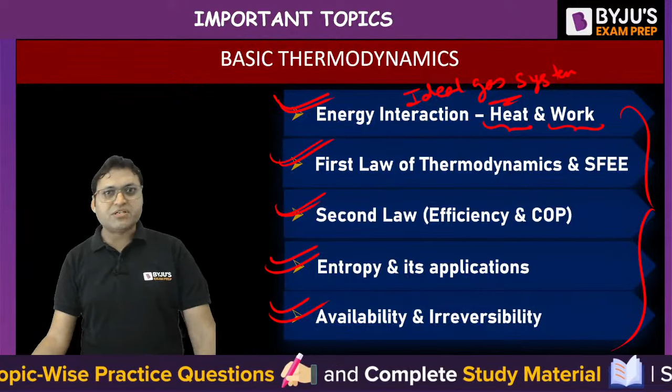And the next important topic is availability and irreversibility. So 90% of the chances are there the question will be framed from any of these topics in your GATE 2024 examination. Still, there are some topics which are again important, like energy interaction along with the ideal gas system, the various processes, how to draw on PV diagram, TS diagram, etc. The basic. And other than that, gas mixture is important. Sometimes thermodynamic relations are also asked, the direct memory based questions. What is the correct expression for any thermodynamic relation, etc. And sometimes the question is asked from the Joule-Thomson coefficient as well. So there are other topics, but these are the most important topics in your basic thermodynamics.

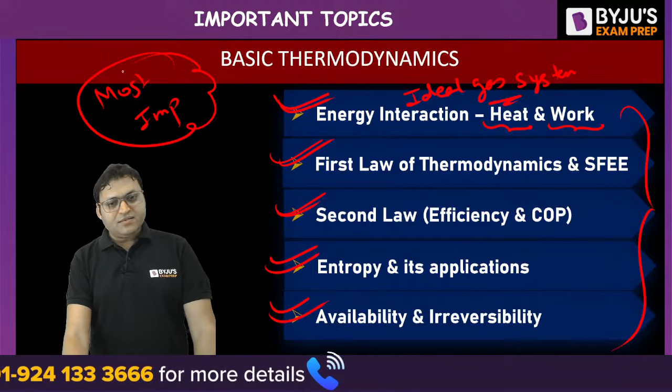Then the application of thermodynamics, the first application is refrigeration and air conditioning. In GATE examination, very few questions or very few topics are asked from your refrigeration and air conditioning. It is not very important. So the topics which are important, you can refer if you have any doubt in any of the topics in R&AC, then these are the standard books. You can refer any of them to get clarity about your doubts: C.P. Arora and R.K. Rajput.

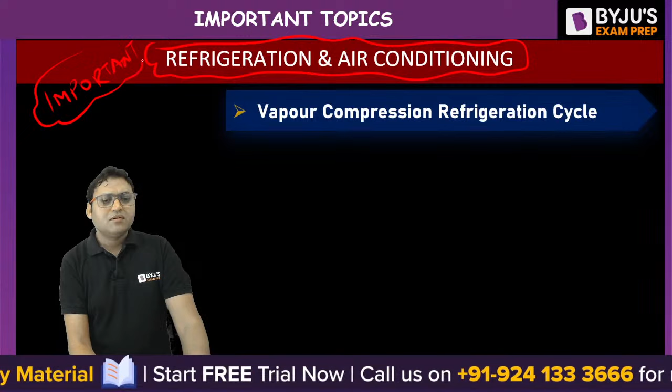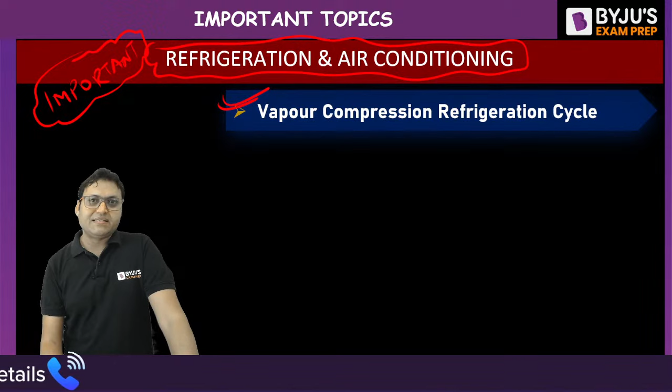The important topics, here I am mentioning the topics which are important, not most important, because very rare chances are there that the questions are framed from refrigeration and air conditioning. If it is going to be framed from vapor compression refrigeration cycle, the question will be of 2 marks. It cannot be less than 2 marks. VC cycle. It can be vapor absorption cycle. These cycles are important.

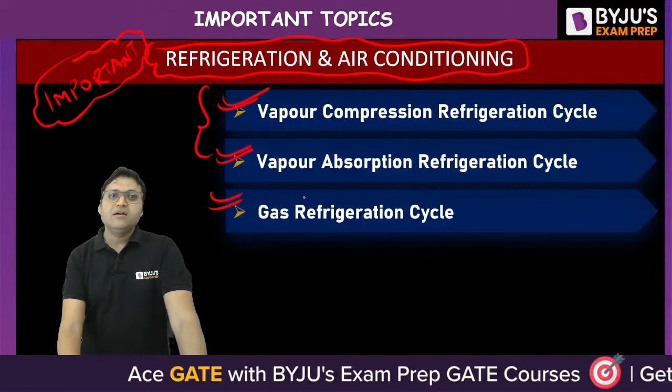VC cycle and VA cycle. Then gas refrigeration cycle, Bell-Coleman cycle or reverse Brayton cycle, and COP of a gas refrigeration cycle.

Then isentropic efficiency of a compressor and isentropic efficiency of turbine is also an important concept we should understand, because if the processes are isentropic, we develop the standard formula. But if the processes are not isentropic, if the compressor or turbine is not having an isentropic process, then we use the concept of isentropic efficiency.

Then the psychrometric in air conditioning - these are the topics. In refrigeration and in air conditioning, psychrometric terms, various psychrometric terms, and how to draw the psychrometric chart. That is the only important topic in your air conditioning.

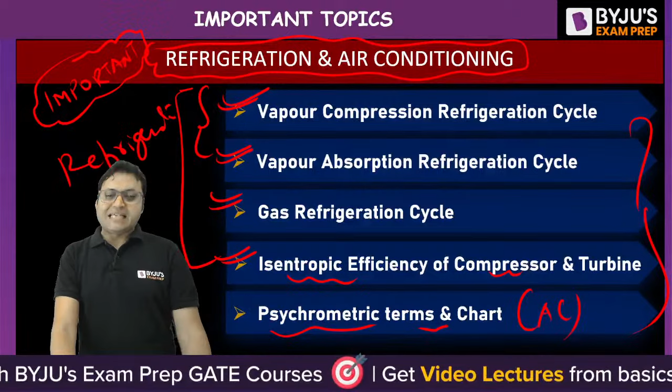So if you are able to understand these topics, it means your refrigeration and air conditioning topic is almost covered. 90% of your syllabus, or 90% of the questions, will be appearing from these topics only. Let us move to the next topic, that is power plant engineering and IC engine.

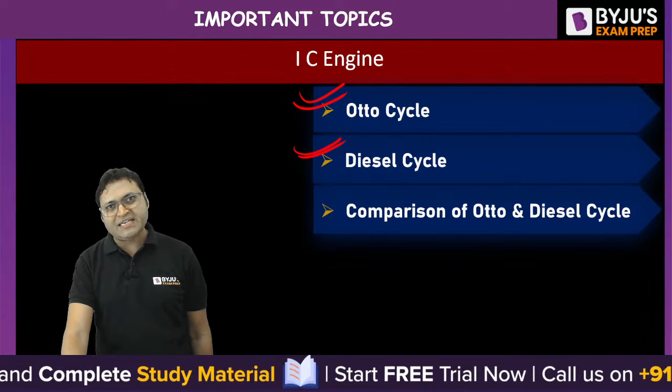Otto cycle is the most important - this is the decreasing order of their importance. Otto cycle is the most important, used in SI engine. Then the diesel cycle is also important; questions come from the diesel cycle as well - direct formula based questions, and theoretical questions can be framed from the comparison of Otto and diesel cycle on various parameters like same compression ratio, same maximum temperature, same heat addition, same heat rejection, etc.

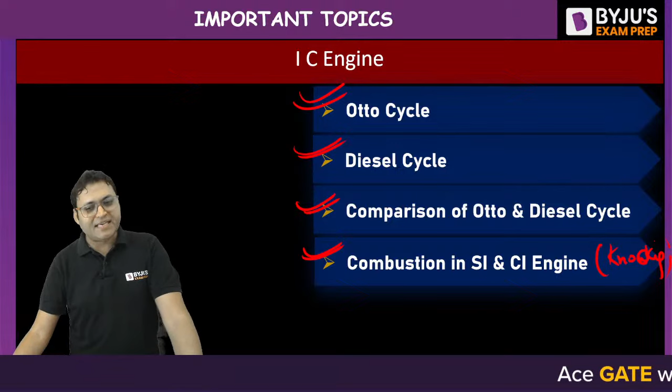Then combustion in SI engine and CI engine, the theoretical concept of knocking - knocking in SI engine, knocking in CI engine, how knocking happens, what are the factors to avoid knocking or detonation in these engines. So combustion in SI and CI engine. Next is stoichiometric air fuel ratio - lean mixture, rich mixture, what is the meaning of stoichiometric air fuel ratio, etc. Basic understanding of air fuel ratio in case of IC engine.

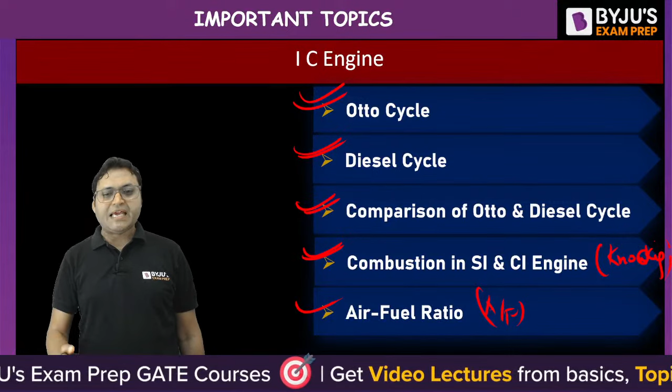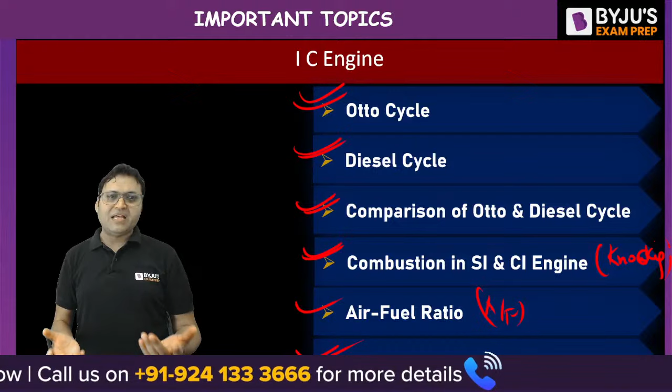And one more important topic is engine performance parameters like indicated power, brake power, frictional power, mechanical efficiency, brake thermal efficiency, indicated thermal efficiency, indicated specific fuel consumption, etc. There are so many terms for which we have formulas. If you know those formulas, you will be able to get the correct answer to questions related to engine performance parameters. So these are the most important topics of internal combustion engine, right?

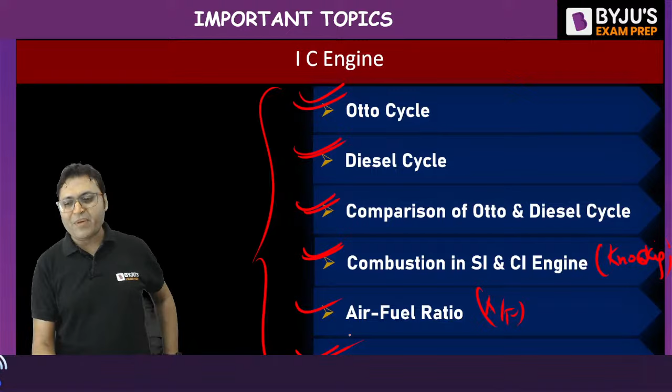And the last application of thermodynamics is power plant engineering. Again, you can refer PK Nag for your doubts in any topic, or you can go for Khajuria and Dubey.

These are the authors of these books, Power Plant Engineering. So not only for written examination, thermal engineering is important, but also if you want to have your MTech in thermal engineering, this knowledge will help you a lot in excelling in your MTech as well. Moreover, because the subject has widespread practical applications, that is the reason it is important for your interview also. So you cannot skip this thermal engineering part. If you are a mechanical engineer, you should be very comfortable, very confident in thermal engineering. You do not have a choice, right?

Let us move to the most important topics in power plant engineering, the Brayton cycle. The efficiency of the Brayton cycle and how to draw it. If one parameter is increased, what happens to the other parameters. Theoretical, conceptual as well as numerical questions are framed from the Brayton cycle, along with intercooling, reheating in the Brayton cycle, how to draw reheating, and how to analyze the Brayton cycle along with reheating, intercooling and regeneration.

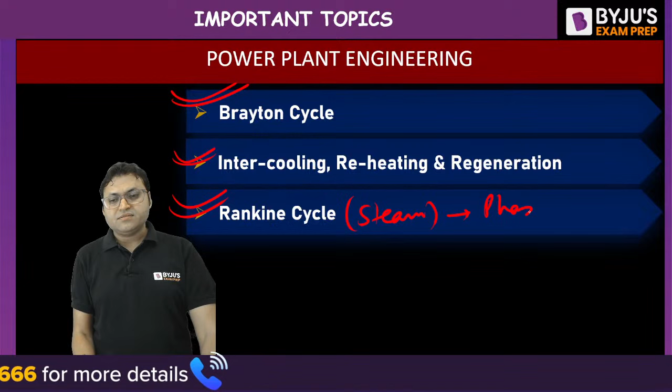Then Rankine cycle, which uses steam undergoing a phase change. Brayton cycle uses air, or a gas.

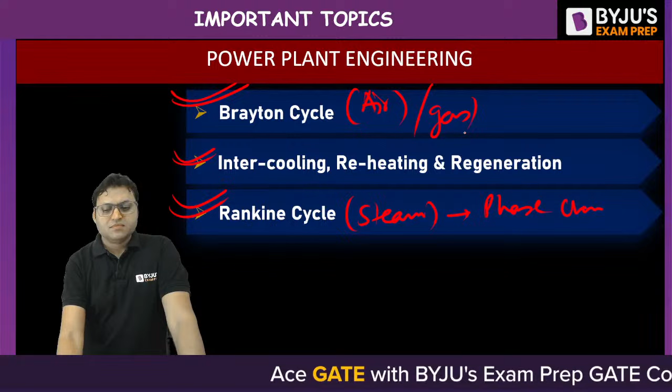Next is the compressor. The velocity triangle, less important though, but centrifugal compressor, reciprocating compressor, axial compressor. The basic formula related to the centrifugal compressor, how to increase the efficiency, what should be the condition for maximum work output, etc. And then in turbine, in steam turbine, impulse and reaction turbines, some basic formulas regarding those.

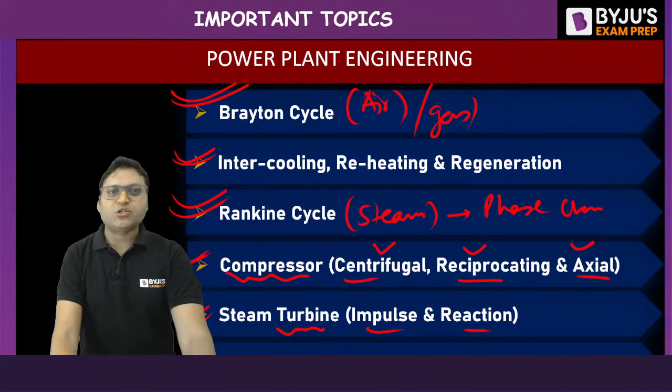Power plant equipments, and then compressible flow is also a part of your power plant engineering. That is also important. These are the important topics which you should revise thoroughly if you want to develop the confidence to get 100% marks in your thermal engineering.

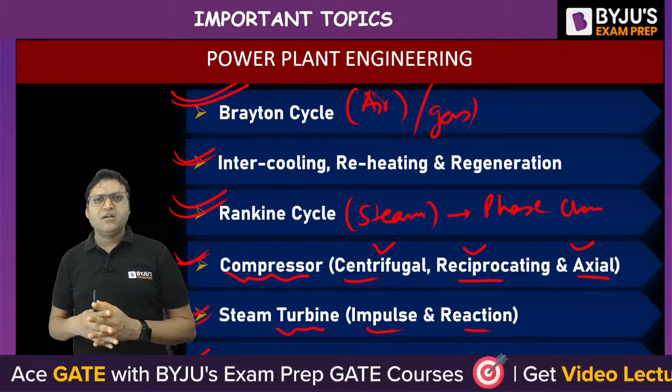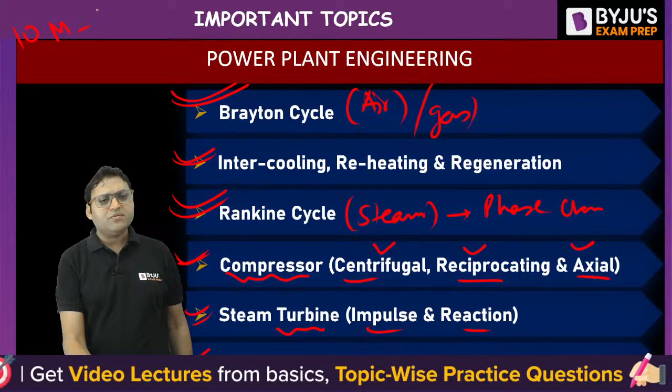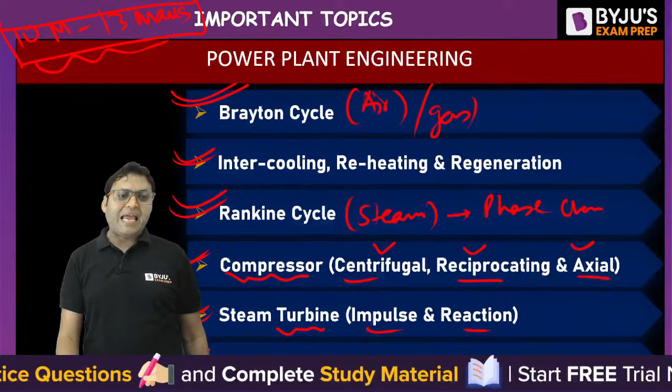In technical subjects, the highest weightage carrying subject is production engineering. It carries around 15 marks, 14, 15, 16 sometimes as well. And the next highest weightage carrying subject is thermal engineering, which carries around 10 to 13 marks. You may find questions lying between 10 marks to 13 marks in your GATE examination from this subject.

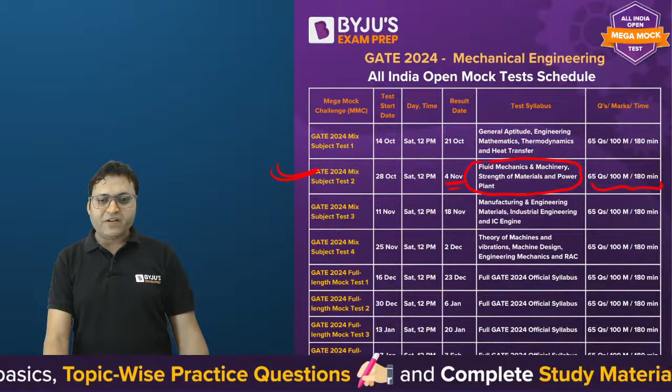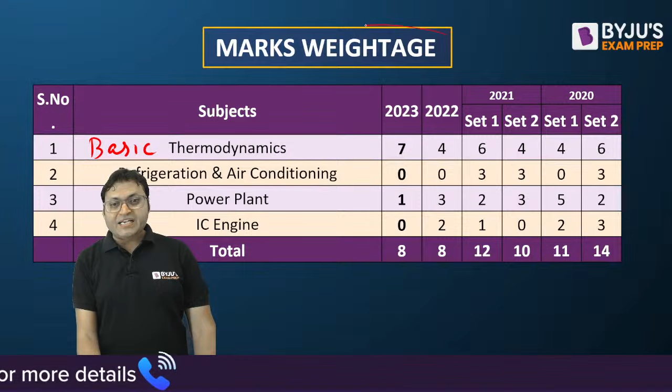Now let us analyze our thermal engineering weightage in the previous 4 years' GATE examination. Basic thermodynamics, if you can see here. This weightage of marks will help you know the importance of the subject, how much time you should devote to it. It develops the confidence that you should not leave any topic, if you want to get a good rank in your GATE examination.

So in 2023, basic thermodynamics was asked for 7 marks, and there was a 1 mark question from power plant engineering.

So total marks was 8 only, lesser compared to previous year papers. Similarly, in 2022, 4 marks questions were asked from basic thermodynamics. There was no question from refrigeration and air conditioning. 3 marks were asked from power plant, and 2 marks were asked, it was 9 in total for 2022.

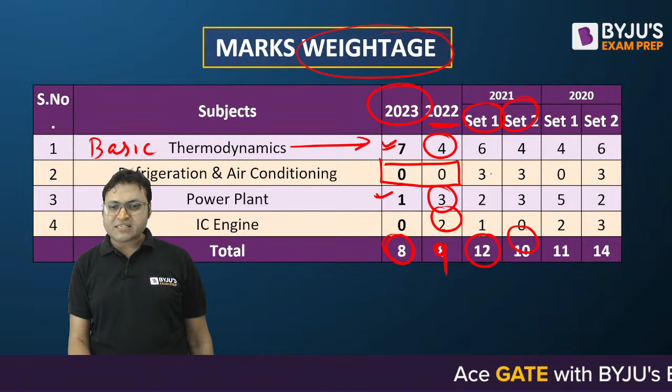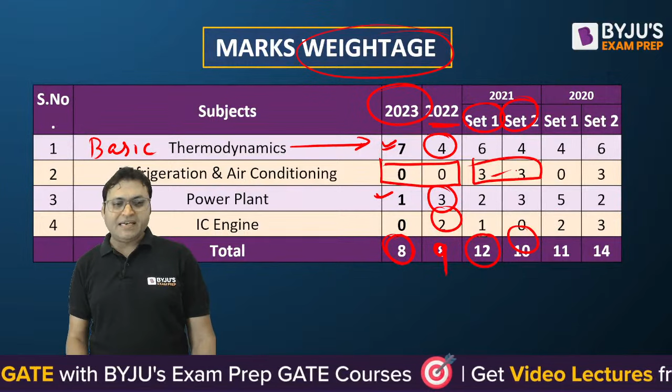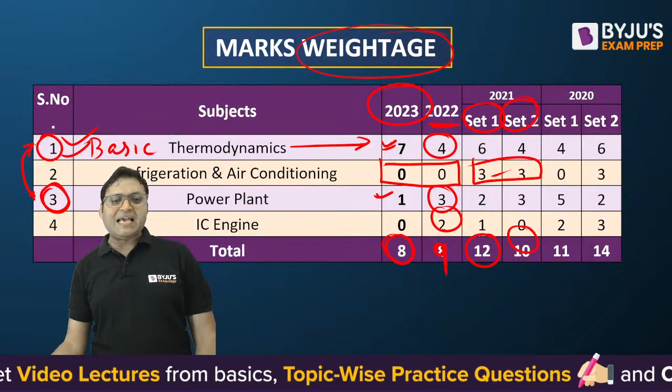In 2021, 12 marks for set 1 shift 1, and 10 marks for shift 2. Again, basic thermodynamics was asked, refrigeration and air conditioning was asked more, power plant was also asked, but in one of the sets, IC engine was not asked. IC engine is asked less. Most important is basic thermodynamics and then power plant. These are the 2 topics which are most important, but sometimes IC engine and refrigeration are also asked.

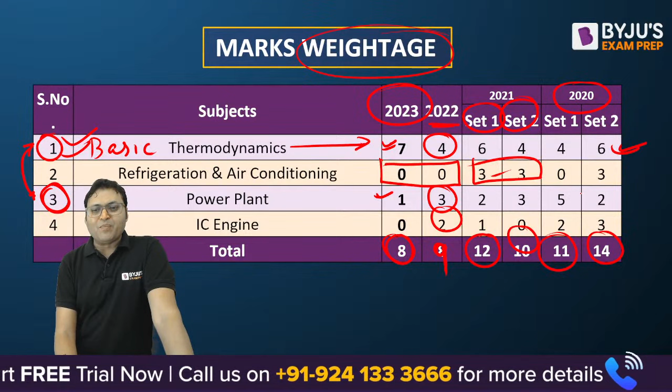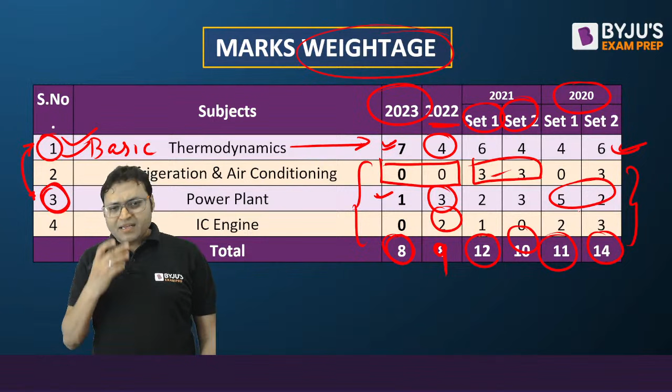Similarly, in 2020, 11 marks and 14 marks. Again, maximum marks were carried by basic thermodynamics, then power plant. So this is how the marks distribution is there. You can see application of thermodynamics has lesser weightage.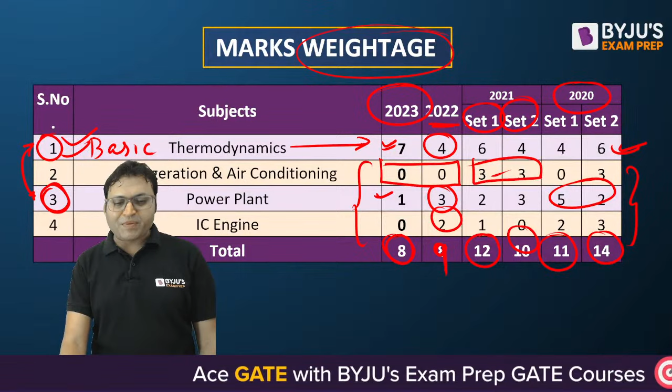So you should prepare your topics. The syllabus is vast, so you should prepare your topics in such a manner that you cover all the important topics, right?

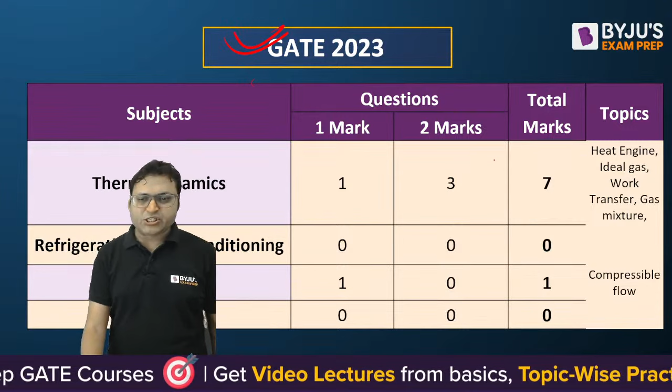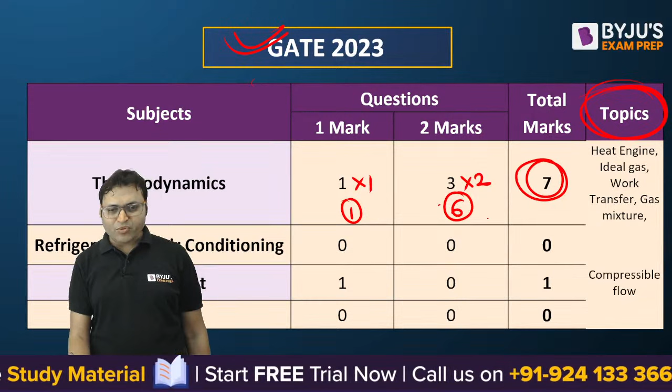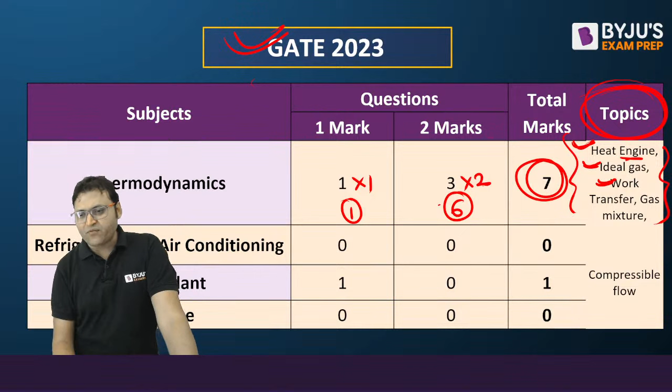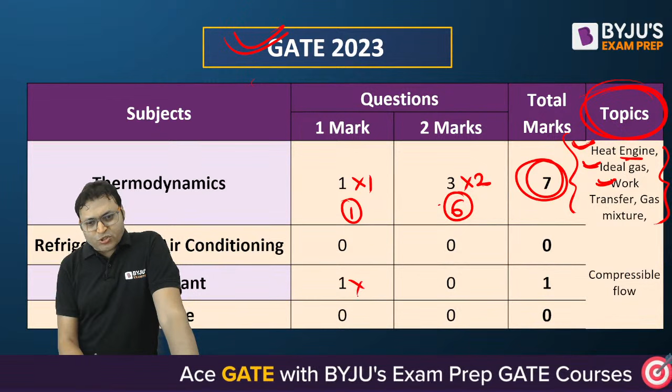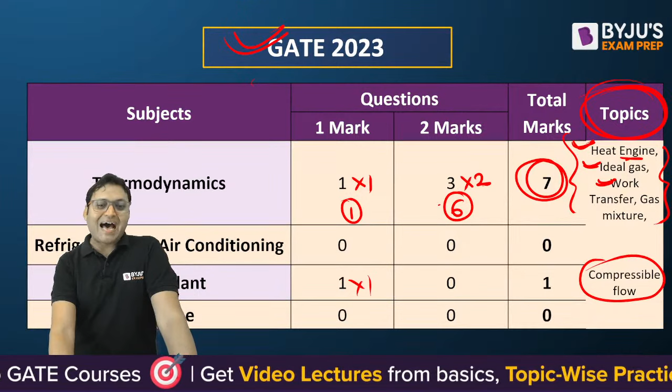4 questions were asked: 1 was from heat engine, another was from ideal gas equation, the 3rd question was from work transfer, and the 4th question was from gas mixture. Similarly, in power plant, it was only 1 question for 1 mark, asked from compressible flow. So in 2023, application of thermodynamics was not asked at all except 1 question from compressible flow.

Let us have a look to GATE 2022. There were 2 questions for 1 mark from basic thermodynamics. 1 question was there from Clausius inequality, another was from work transfer. So 2 marks for basic thermodynamics. R and AC is not asked in GATE 2022 as well.

Power plant, 1 question for 1 mark and 1 question for 2 marks. There were 2 questions: 1 from Rankine cycle for 2 marks, and again 1 from compressible flow for 1 mark. It was MSQ actually, right? And IC engine, there was 1 question for 2 marks, from the Otto cycle.

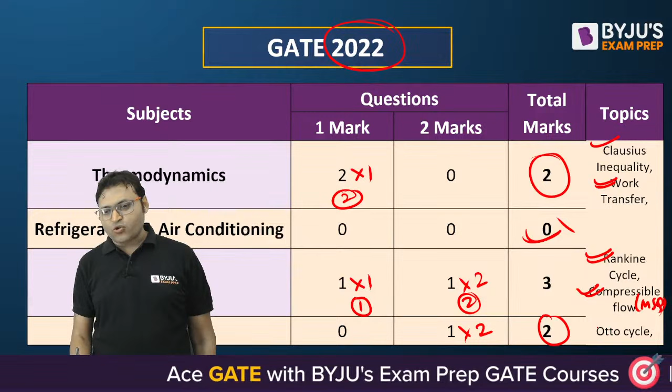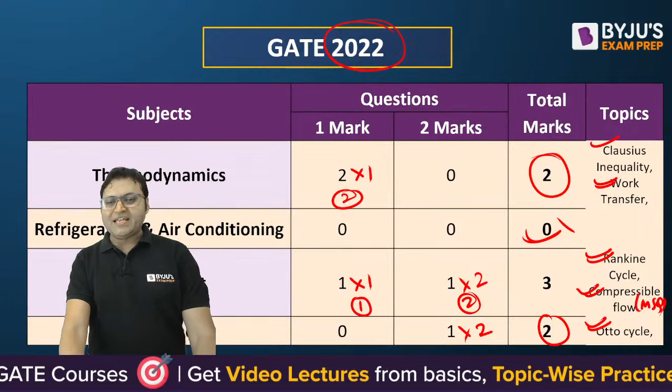So this is how GATE 2022 distribution of marks from the various topics. These were the topics from where the questions were asked.

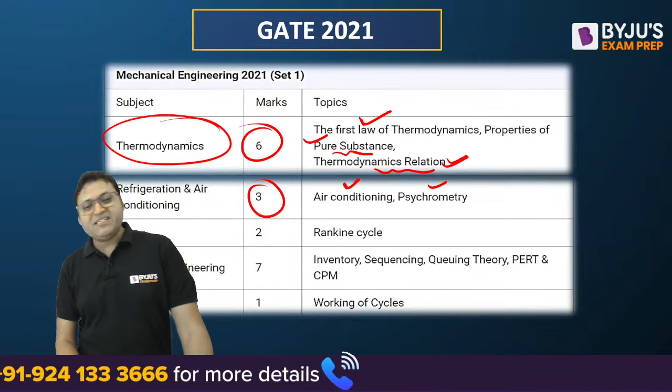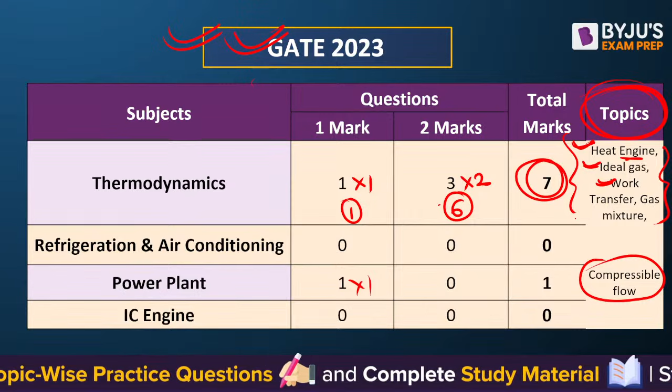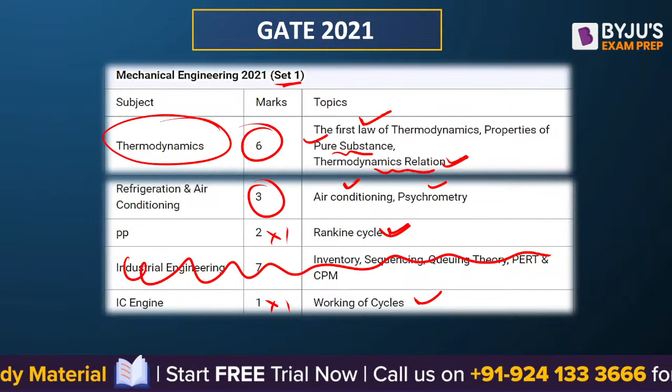This was for GATE 2023. These were the topics which were asked in GATE 2023, and these were the topics which were asked in GATE 2022, right? And the topics asked in GATE 2021 were these.

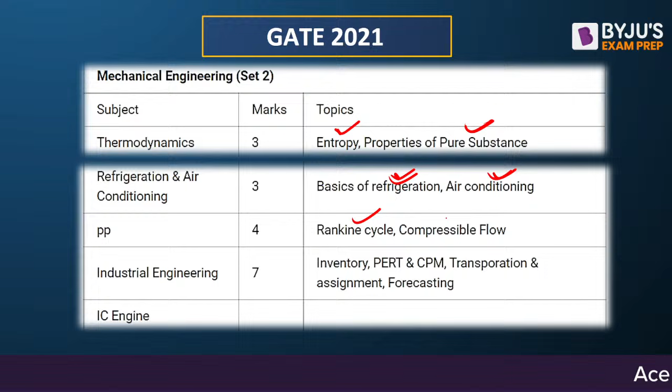And in GATE 2021 set 2, from thermodynamics, there was a question from entropy and pure substance. RAC covered basics of refrigeration and basics of air conditioning. Power plant had questions from the Rankine cycle and compressible flow. So normally the questions are not asked from the compressor and the steam turbine.

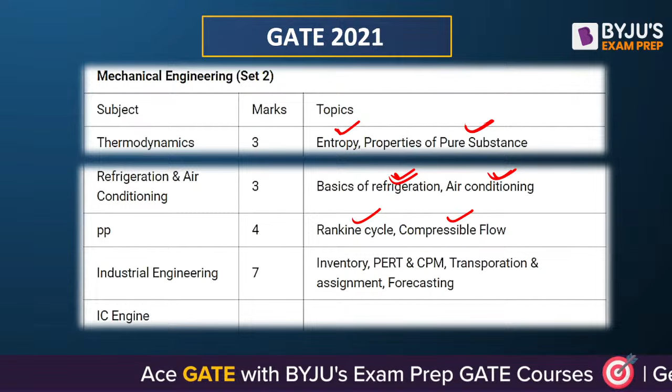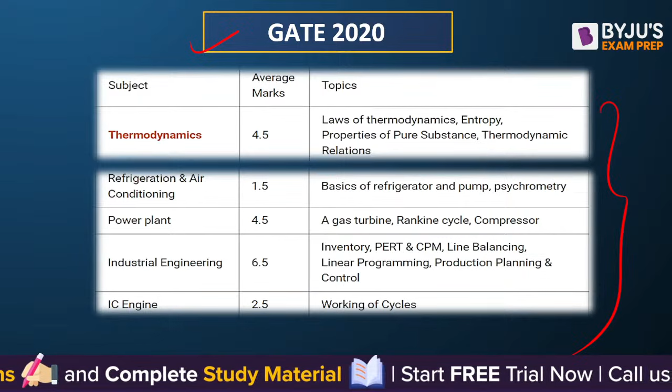Laws of thermodynamics, first law, second law, entropy, pure substance and thermodynamic relations had average marks in both set 1 as well as set 2.

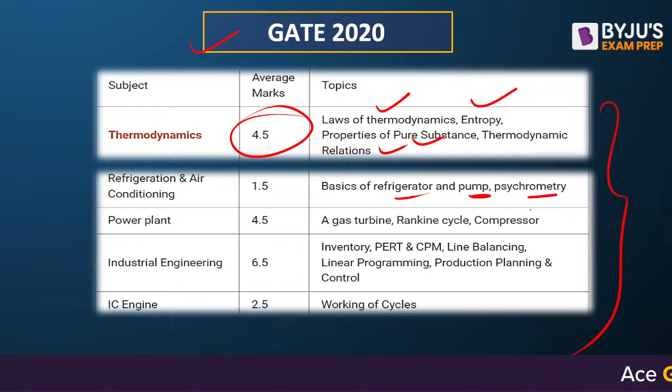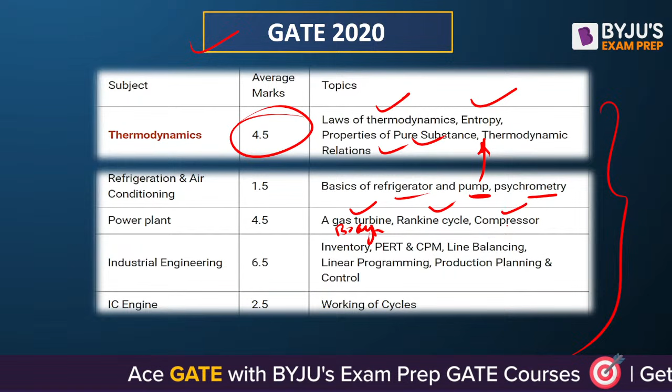Refrigeration, basics of refrigerator and pump, pump is a part of basic thermodynamics only, and psychrometry. Power plant, gas turbine that is Brayton cycle, then Rankine cycle, then compressor. There was a question from the compressor as well asked for around 4 to 5 marks. Then industrial engineering, forgot about that. IC engine was also asked for 2.5 marks, on the working of the Otto cycle.

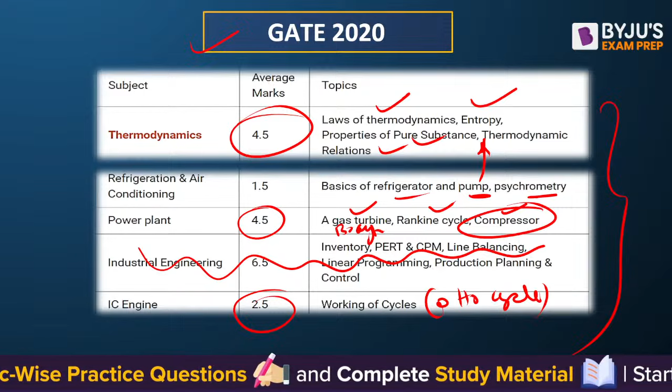So this is how the distribution of marks was in GATE 2020. You should practice GATE previous year questions, as well as questions from engineering science. Thermodynamics is also part of engineering science, so you should get questions from the engineering science previous year papers and practice those as well, because the difficulty level of those questions is quite similar to your mechanical paper difficulty level for thermodynamics and its application.

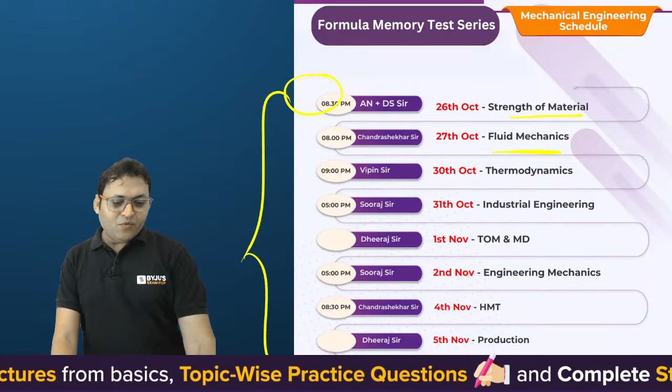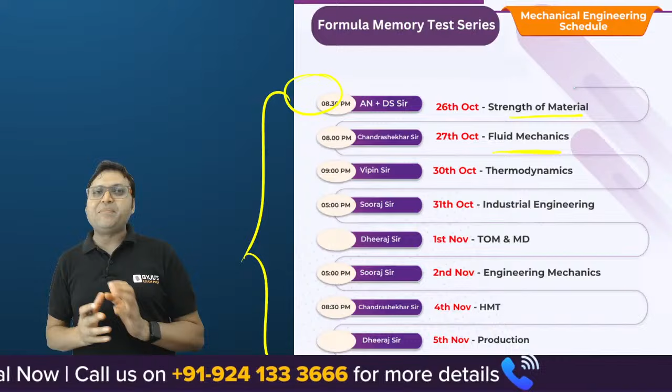I hope you liked the session and got an idea of what are the important areas and how to revise. One more thing I would like to mention, your revision should be time based. Fix some time and decide some target, it should be kind of target based revision. So decide some target to have the revision of a particular topic, and do the revision in a limited time frame. That is how it will be more efficient, you will be more focused, right?